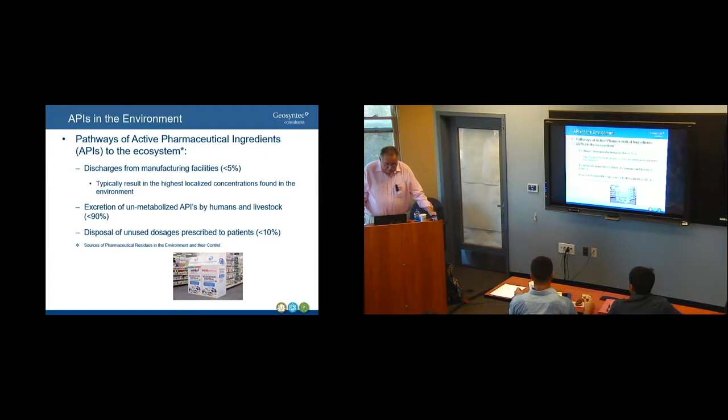So APIs in the environment can basically be classified into three areas: toxic chemicals, what I call cytotoxic chemicals - really some of your anti-cancer drugs, which at very low dosages are extremely toxic to the human body - and endocrine disruptors, hormones. That's an issue because you hear about feminization of fish in aquatic streams and things like that. And then the other one is antibiotics.

Antibiotics are, I think, one of the real emerging issues coming up these days. If you look at any of the World Health Organization information, there's a lot of talk about antimicrobial resistance. Antibiotics are so prevalent in our ecosystem that there are now many different bacteria becoming resistant - there are resistant strains of tuberculosis now. It's a real issue. And pharmaceutical companies' biggest focus now is antibiotics - how to treat them to make sure they don't go into the environment.

So why is there a focus by large pharma on this issue? A lot of our clients are large pharma - big companies like Bayer, Sanofi, Pfizer, Johnson & Johnson. It's because they use contract manufacturers throughout the world. The pharmaceutical industry has become very competitive - it's not like it was 15 years ago when they were making tons of money. The problem is a lot of these drugs have gone off patent and become generic. There are no big blockbusters out there.

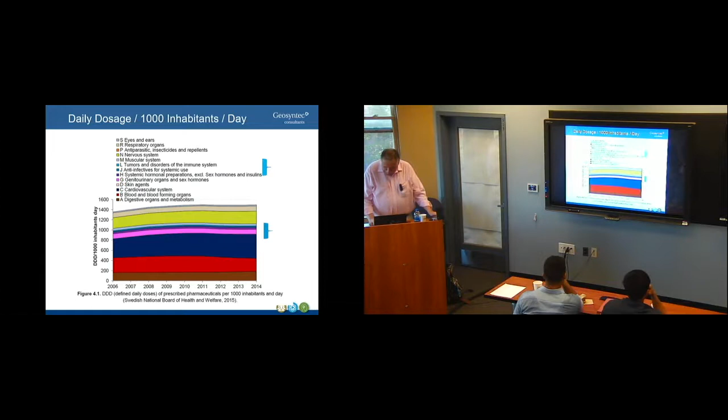So we talked about cytotoxic APIs, and again, these are just basically high potency active pharmaceutical ingredients, and they're extremely active from a pharmacology perspective, but they can also be extremely toxic to humans. And they have very strict requirements as far as the health and safety of people who manufacture these compounds. Again, fortunately, they're the most extremely toxic compound, but they're at the lowest dosage. So you don't really see cytotoxics that much in the environment. If you do, you see them in really low part per trillion concentrations.

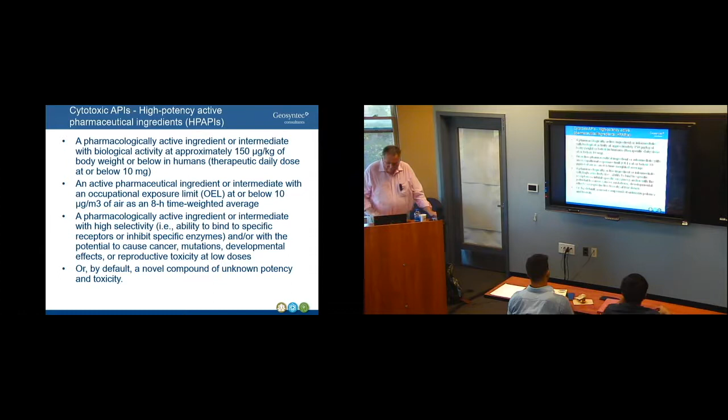And the normal way to handle these compounds is, as mentioned, level A PPE. You have to dress up in moon suits basically to handle this stuff. These are specially designed systems that basically contain the air, so they have special air handling units. They have isolation locks - when an operator comes out, he's decontaminated with hypochlorite or some solution. They go through, like a typical hazardous waste site, a decontamination area.

And the fortunate thing about cytotoxics is because of how toxic they are, they're very well handled in the pharmaceutical industry. We have special treatment processes that handle this stuff. They're acidified, they're hit with caustic, or they're chlorinated - and that's how, depending on the molecule, the anti-cancer drug, they treat any kind of waters that are generated from that formulation.

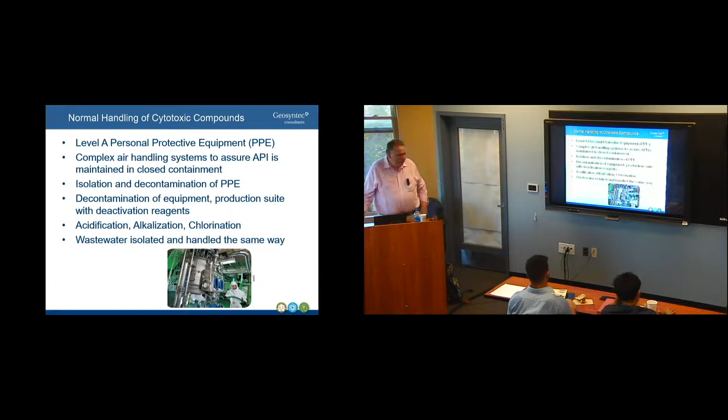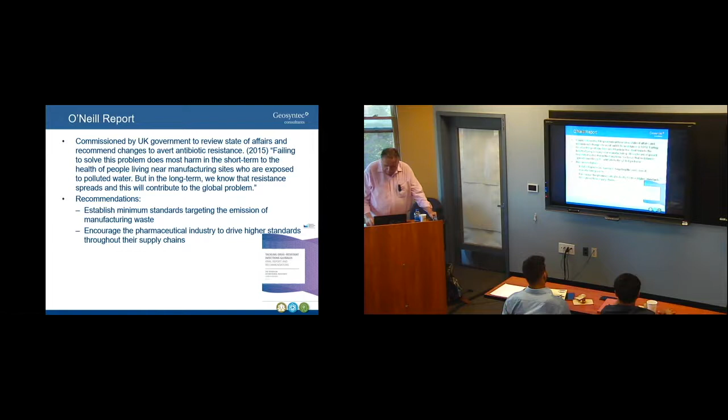So this O'Neill report was sort of a genesis on a lot of the antibiotic-resistant organisms. It was commissioned by the UK government, but basically said we got to do something about this. This is really important, this is a major issue, understanding antibiotic resistance and how it impacts basically our human health. And so in the United States, there's greater than 25,000 deaths a year due to just basically the fact that we don't have an antibiotic that can handle that particular infection.

So it's become an extremely important issue with the pharmaceutical industry. I can tell you that all the major pharmaceutical companies, all the major heads of the environmental health safety divisions are focused on this issue. This is a major issue. And one of the things that is kind of interesting is there's been a lack of discovery of new types of antibiotics. So that's also not good either. So the combination of having this issue come up and the fact that we're not discovering any new types of antibiotics, it's an issue in the world.

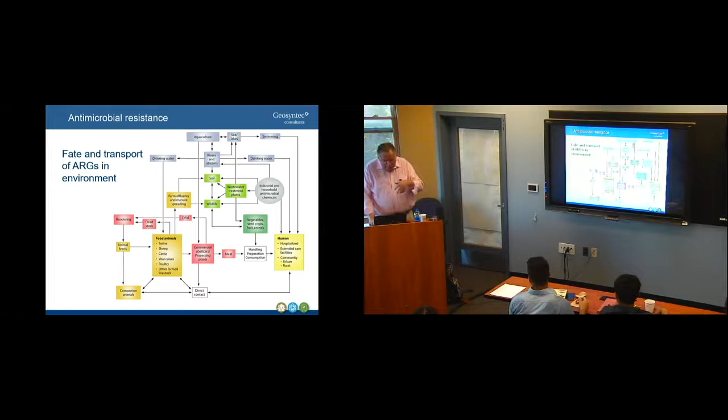but this is just a slide that talks about the fate and transport of the compounds in the environment. And what everybody thinks is that in wastewater treatment, you're biologically treating waste. You may break down the molecule and get some removal. Well, it's great, it doesn't go out in the water, but it goes out in the sludge. So what do you do with the sludges? A lot of sludges go to land. So it gets into the food chain, and that's why it's sort of an endless cycle.

So I want to talk about how to remove APIs, active pharmaceutical ingredients, and how to predict them and how to prevent them. I'm going to talk a little bit about pharmaceutical processes.

So what we do in the pharmaceutical industry is an impact assessment. You evaluate the pharmaceutical process and determine how it gets into the water, into the wastewater system. So we end up generating estimates. Some estimates are based on batch records. We can really determine what we call basically unaccountable losses, because the pharmaceutical industry is so driven by batch records.

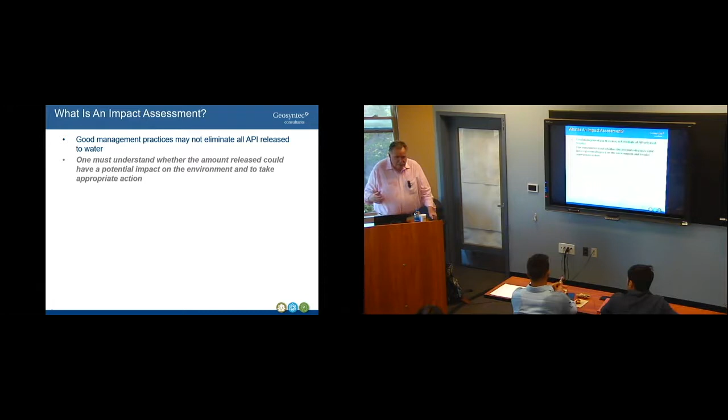Everybody knows what the yield is. So I could say I added 70 kilograms of this active ingredient and I got 99.92% yield, because I know what went into my product. I know what went into my samples. So it's a very well regulated process, but it requires a lot of data interpretation and professional judgment.

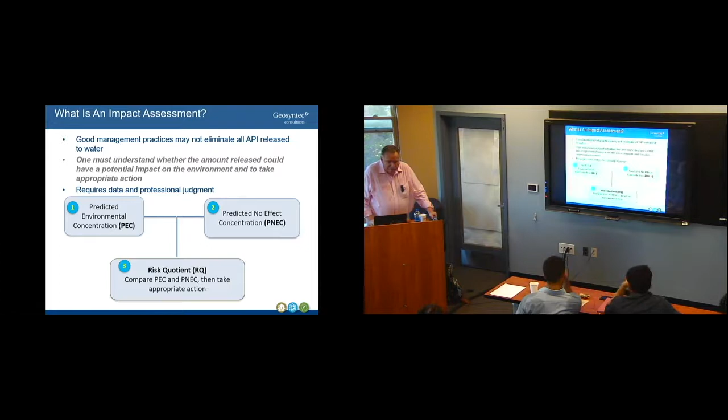People who know the processes. So what we try to do first is predict the environmental concentration, the PEC. And the other piece of information we have is the predicted no effect concentration, the PNEC. There's ways to calculate the PNEC value. And then what we do is take the PEC over the PNEC and develop an RQ, risk quotient. Anything over 1 requires appropriate action. So it's a desktop risk assessment for looking at pharmaceutical processes.

So calculating the PECs is how much goes into the environment, and essentially it's just a mass balance, understanding what the flow is and what the concentration is, so you know how much mass goes into the environment. Sometimes in predicting environmental concentrations, we want to understand the effect accounting for dilution, like receiving streams when the wastewater goes into a receiving stream. We also want to understand if there's any reduction that's occurred at the facility. So we need to understand treatability and dilution factors.

So at an operating facility, you have what you're making, say a pharmaceutical liquid, you're putting the active ingredient in, then potentially you dispose of some of that liquid down the sewer, and you can figure out what the mass is. That's the sort of loss that you may not want to see go down the sewer, and we call that the unaccountable loss.

A lot of the loss occurs through systems like dust collection systems, used for engineering controls. That stuff goes into filters and ultimately is incinerated, because we incinerate all our APIs. We don't put them into landfills. Everything in the pharmaceutical industry is incinerated.

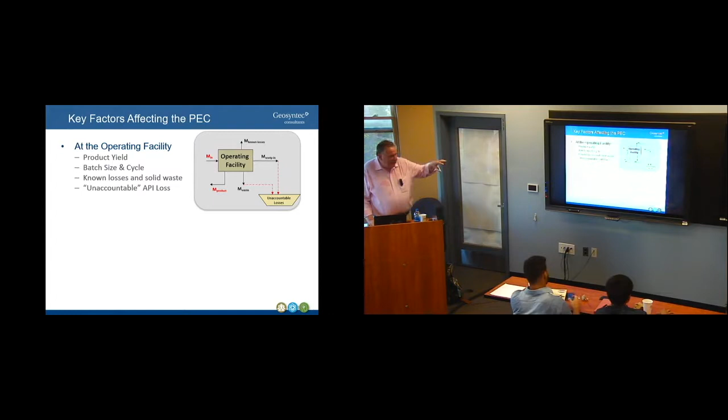So looking at the operating facility, the other aspect is understanding what is happening at the wastewater treatment plant, at the pharmaceutical facility if they have a wastewater treatment system, or understanding what's going on at the POTW. And then ultimately we want to understand how it hits the receiving stream. So we're focused really on what is the predicted environmental concentration in the receiving stream. That's the most important number we need to calculate.

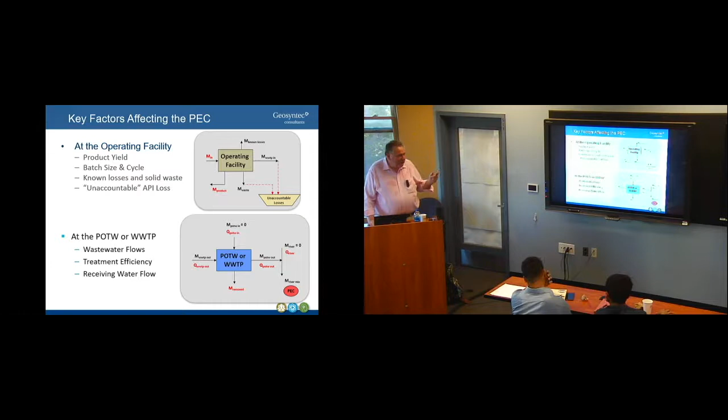And then we take that and we want to know what the PNEC is. There's a couple ways to figure out PNECs. One is looking at your aquatic data, and the more data, the better. What we do is look at the lowest no effect concentration of that particular species, whether it's Daphnia or green algae, things like that.

Sometimes that data is available from the supplier, but you can take that information and calculate a PNEC by taking the lowest concentration that's recorded and dividing it by an assessment factor. In this case, we divided it by 10 because we had 3 data points. So that's how you calculate the PNEC. In this case it's relatively low, 0.014 milligrams per liter. So that's a predicted no effect concentration.

There's also published values of PNECs. The Antimicrobial Resistance Alliance has published PNECs for all antibiotics, pretty much everything. Also, there are a lot of good scientific journals out there that have PNEC values published. And then basically in Temple, there's the Water Environment Technology Center, and they do a lot of this type of research, understanding what the PNECs are.

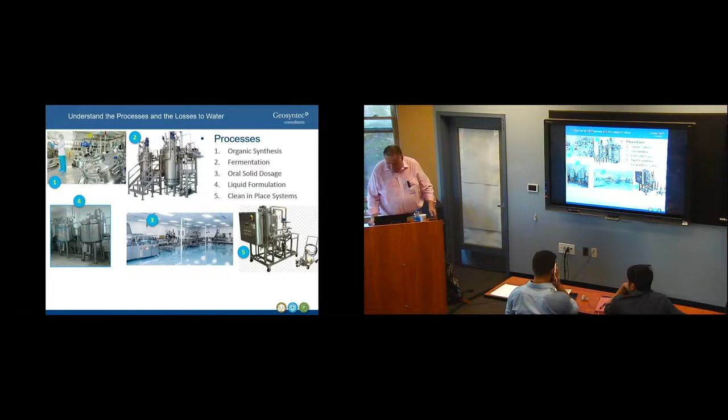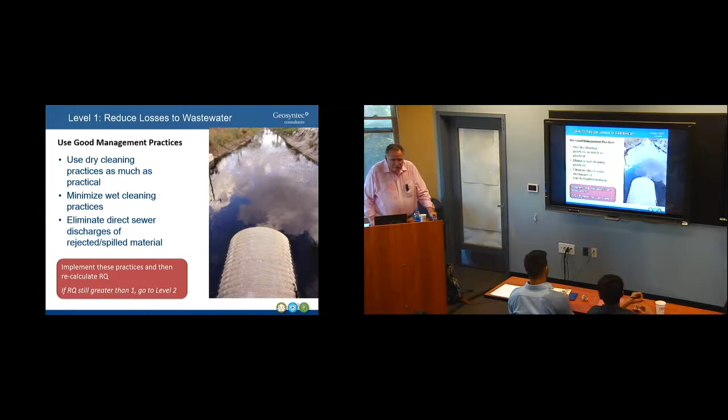So again, basically you want to reduce the API that goes to wastewater, so you want to use dry cleaning practices as much as practical. You want to minimize wet cleaning processes, and you want to eliminate the discharge to sewers. You want to do these things and see if your RQ is less than 1. If it's not less than 1, you need to go to level 2, which I'll talk about. That's point of generation treatment.

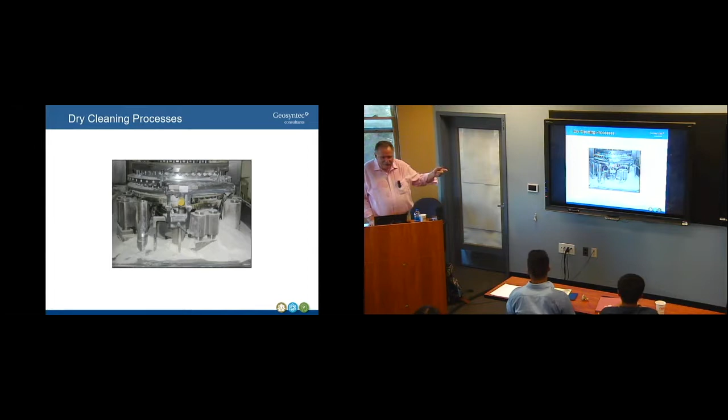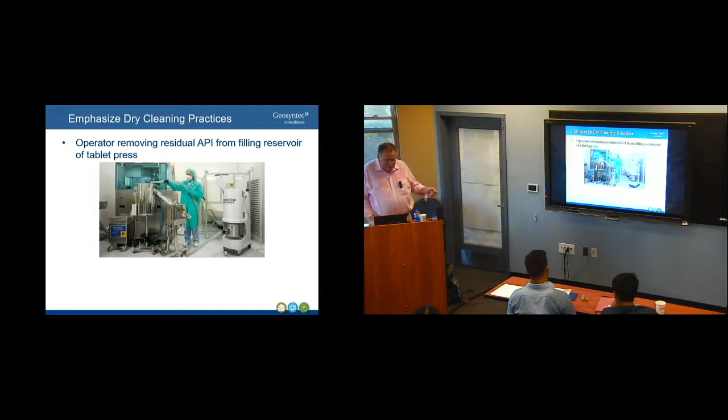So you want to minimize wet cleaning practices. Again, you don't want to be taking a fire hose and hosing down all the equipment and putting it to the drain. The objective is to first suck up this material as much as possible and incinerate the powder that you collect, and then you can use your wet cleaning process.

The other thing you want to do is eliminate direct discharges to the sewer. This is a liquid formulation suite to the right—it's an immaculate system with epoxy floors and no floor drains. The idea is to clean these tanks using a clean-in-place system to the left, and capture that water after cleaning in place and treat it specially. We don't want to just discharge that to the sewer.

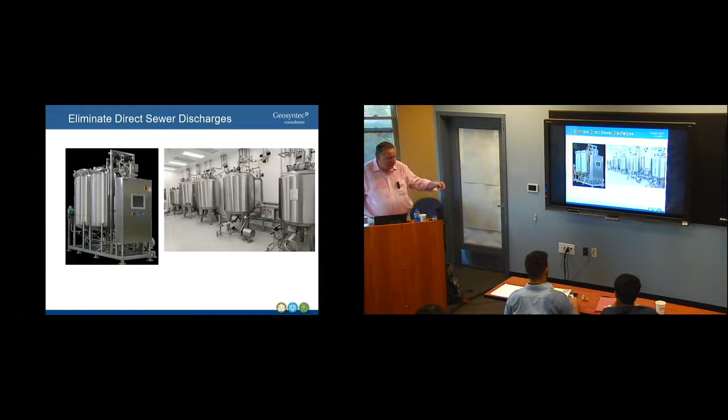The second level of treatment is to collect wastewaters at the point of generation. We have clients that clean their equipment with first and second rinses. It has very minuscule concentrations of API, but they don't want to send it to the POTW—they want to collect it and take it off for off-site incineration.

But there are other treatment steps. You can do alkaline treatment, you can do advanced oxidation. A technology we're looking at is electrochemical advanced oxidation.

That's actually used quite a bit in India because of the price of energy—evaporation, zero liquid discharge technologies. I don't know how, I've heard zero liquid discharge is used more prevalently in India. I don't know if that's more of an urban legend, or if it's because there's also high concentrations of pharmaceuticals in surface waters in India. And then again, off-site incineration.

This is an advanced oxidation system, which basically takes small volumes of wastewater, collects it, and runs it through a hydrogen peroxide ozone process called HiPOx. Again, we want to make sure that after you do this, the impact to the environment—the RQ—is less than 1.

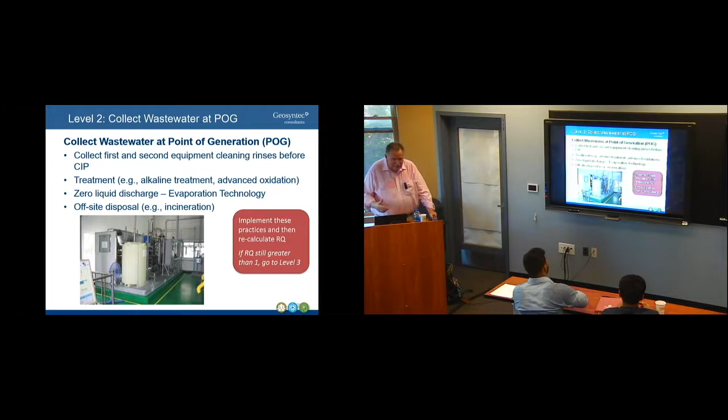If it's not less than 1, we have to go to level 3, which is end of the pipe. But I want to show you another technology we're looking at now—it's a simple evaporation process. You're taking those wastewaters that have those concentrations in them—not high volume—and you're evaporating, generating a steam plume, and you end up with a brine at the end of the process.

So this is something we're looking at right now for clients. It's a very cheap way to treat water—with the price of natural gas, it's somewhere between 8 cents, maybe as high as 15 cents, but mostly less than 10 cents a gallon. The other interesting thing is it's much cheaper than off-site incineration, where you pay a buck a gallon or even $1.50 a gallon to incinerate water.

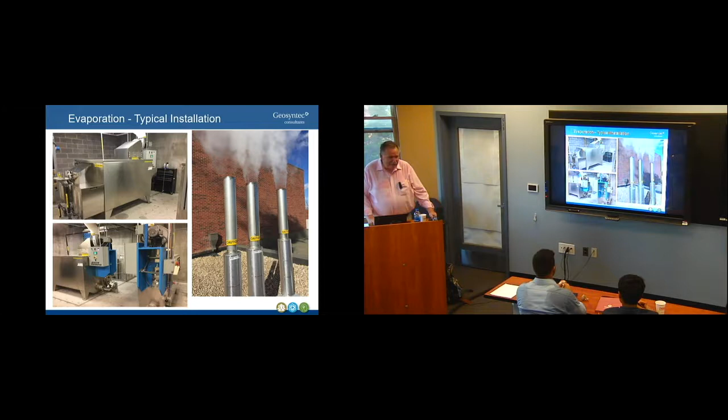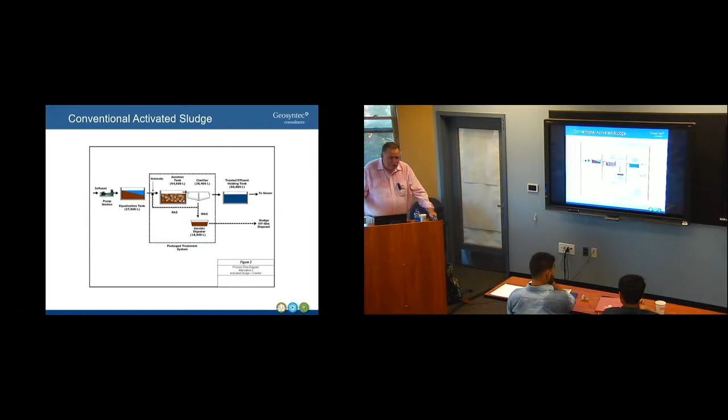I want to talk at a high level about some of the treatment technologies that are working out there. Conventional activated sludge—everybody likes conventional activated sludge. I've put a lot of these systems in at pharmaceutical facilities over my years. It's great to remove the API out of the water, but you also want to understand what's in the sludge.

Sequencing batch reactors—another aerobic biological process. When I first started my career, I was the first one to put in an SBR in Puerto Rico. That was the first SBR that was ever constructed in Puerto Rico. It worked great because it just consumed alcohols.

It was like alcohol was jelly beans to the bugs. We generated sludge, but it was a great system and really saved a lot of money for the company. It was funny—when I went back after the pharmaceutical industry changed ownership, it used to be owned by Pfizer, then Johnson & Johnson, then Pharmacia—it had this crazy history behind it.

I got sent down to this plant because they knew I put the wastewater treatment system in. So I go down there and they're running the wastewater treatment system. I asked, 'What's your loading rate?' They said, 'Oh, it's about 5 pounds a day.' The thing was designed for 2,000 pounds a day. I said, 'You're kidding me, you're running this system like that?' So what I did was take all the alcohol that was being incinerated by Veolia at $1.50 a gallon and just fed it to the biological system.

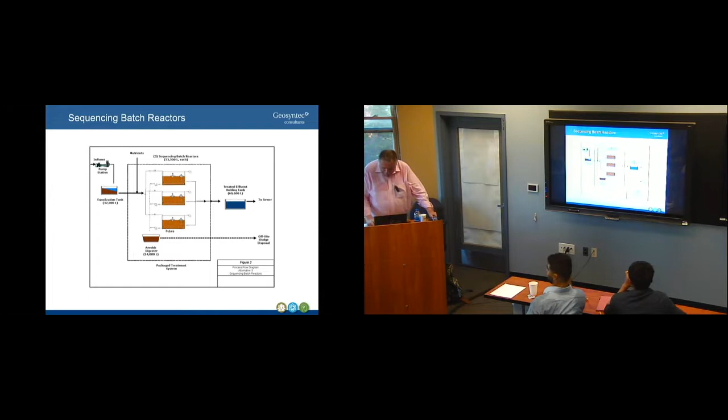So it worked great. So moving bed reactors, another technology, and another technology are basically membrane bioreactors.

That's sort of like some of the new pharmaceutical plants are putting these systems in. These are generally at large API plants that generate or synthesize chemical, organic APIs. They don't put these systems in at formulation facilities because they have a very weak load. There's not much high strength wastewater coming from a formulation facility.

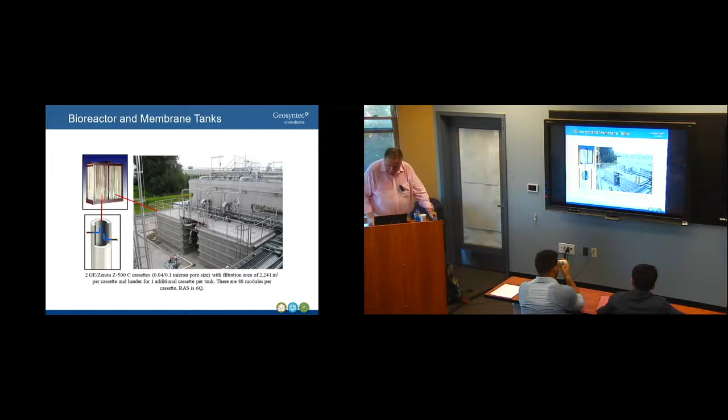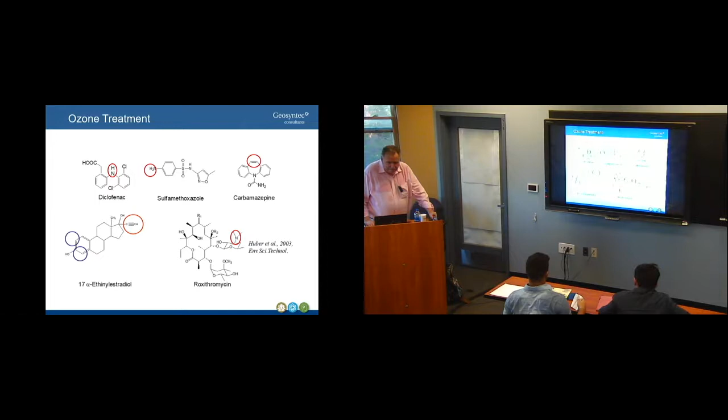Ozone works great. We've got systems in with ozone, and it works well. Especially on certain pharmaceuticals, hormones, antibiotics. It cleaves a lot of critical rings, so ozone treatment is a very prevalent process in wastewater at pharmaceutical facilities.

We did an evaluation of chemox treatment processes, looking at UV, hydrogen peroxide, catalyzed UV hydrogen peroxide, different chemical oxidation processes, and the compound reduction we get with APIs, reducing the API in the water, is like over 99%. The problem is with these processes, if you have a lot of other organics in there, like alcohols, it's a much higher cost. So generally, you try to use this more as a polishing process rather than at the end of the pipe.

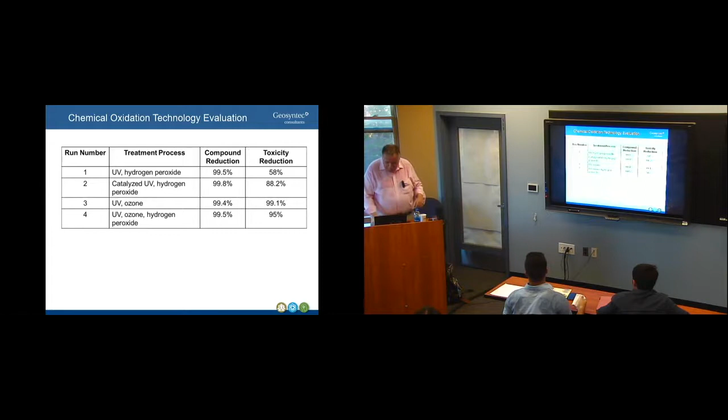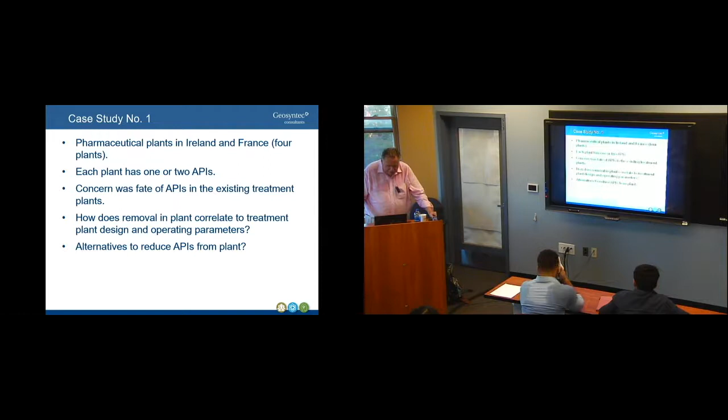Case study in Ireland and France, we looked at 4 plants. Each plant had 1 or 2 APIs. We were concerned about the fate of the API leaving the treatment system. We wanted to understand how the removal correlated to the treatment plant design.

So, we looked at a site in Ireland. We had some different types of APIs, a mixture of hormones, various synthetic hormones, and hormones that come from extraction processes.

Real interesting concept. Be curious to understand if anyone knows how a particular hormone is basically processed. How do you get a hormone? Does anybody know? There's a hormone out there, mostly women take it, called Premarin. What does Premarin mean? Where does it come from? It is pregnant mare urine. Yes, it is. Very good. Are you from Canada?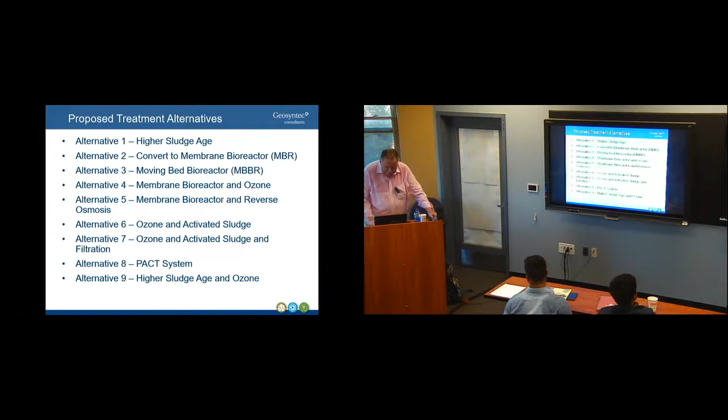So one of the things we did was look at a bunch of different processes, higher sludge age, different types of biological treatment. This was an evaluation of different alternatives, and we ended up looking at a membrane bioreactor to take out the high strength materials, the organics, followed by an ozone oxidation system. It really did a great job. The combination of biological treatment followed by ozone polishing worked out well.

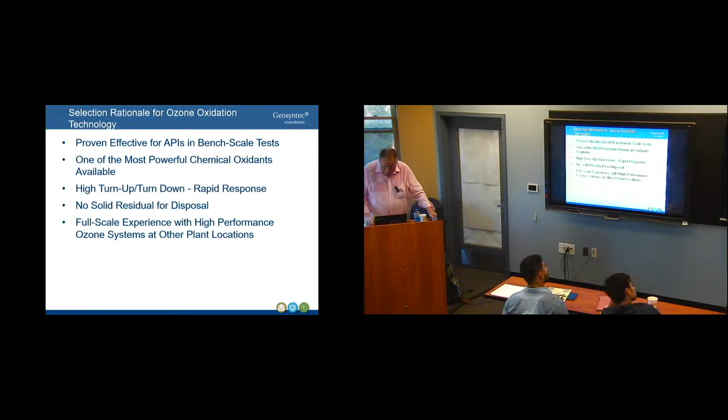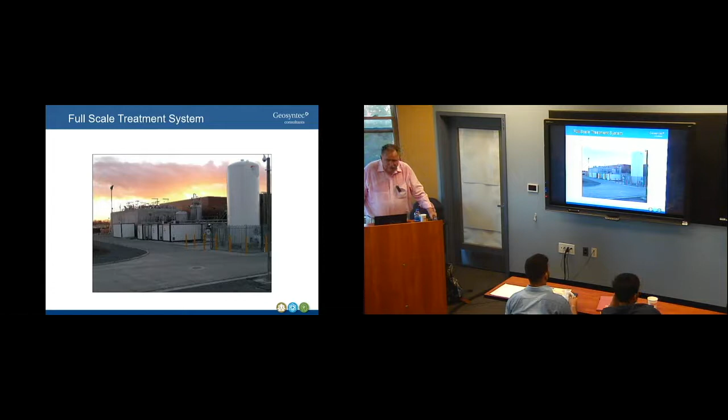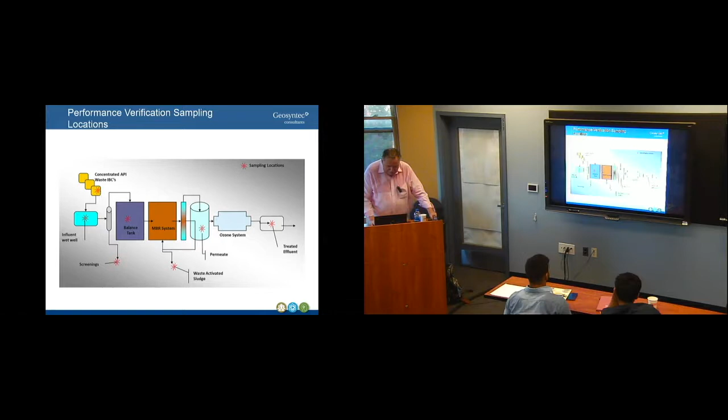Here's basically the ozonators at the site, and we did a bunch of sampling in this process. So we did performance verification, and what we did in this facility, we looked.

And then we also did an estrogen screen at this site because it had hormones, and again the hormone concentrations were significantly reduced.

So kind of my takeaway on this, I wanted to really drive some points home with you guys before you leave. The current driver in the pharmaceutical industry is antimicrobial resistance, and reducing the amount of antibiotics that get to the environment. So we're working with some clients now looking at specific treatment processes.

It's interesting, some of these pharmaceutical facilities that basically make antibiotics are done mostly with fermentation. And the fermentation process involves larger volumes. They end up generating larger amounts of liquid waste. And some biological treatment systems work really well on certain antibiotics, certain molecules, and sometimes they don't break it down.

So we're looking at some bench scale work right now where we're increasing the temperature of the wastewater and then hitting it with chlorine basically. So there's another thing we're looking at now, electrochemical advanced oxidation processes.

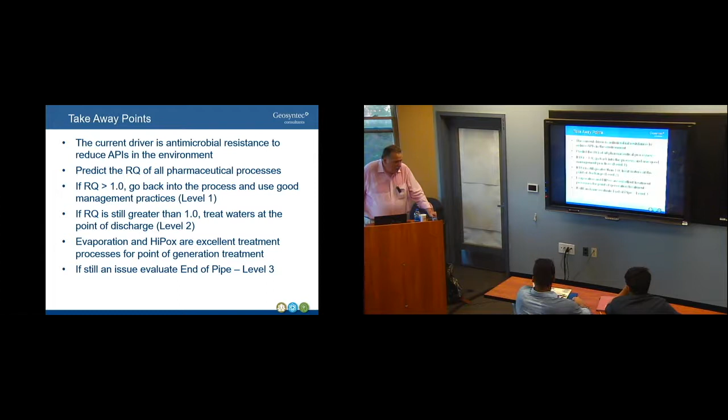Evaporation's a good technology. HiPox systems are an excellent process. Again, that's hydrogen peroxide and ozone. And then if it's still an issue, go to level 3, which is end of pipe.

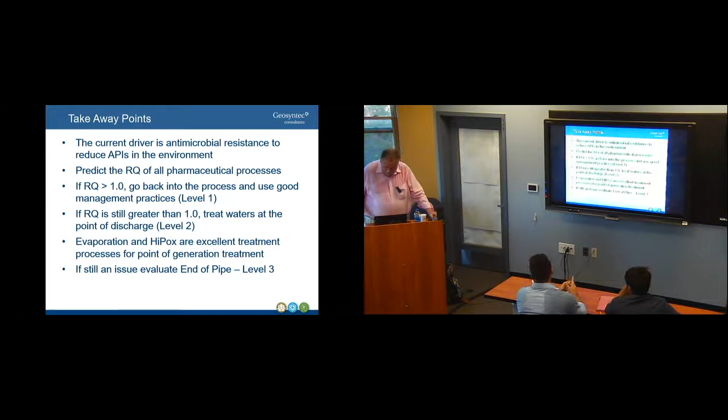So we found that biological treatment plus advanced oxidation was really a proven process train that worked very well. We used biological treatment to take care of the majority of the organics, and then polished it with advanced oxidation. Ozone and other oxidation processes have been used very well in that polishing step.

And we found in that analysis, for estrogen compounds and APIs, we got over 99.9% removal.

We look at treatability studies, process modeling tools, and we're working with clients today in coming up with different design criteria to come up with solutions if you have to go to end of pipe. Carbon adsorption, alkalization, electrochemical processes, thermal evaporation, they're all decent processes to evaluate.

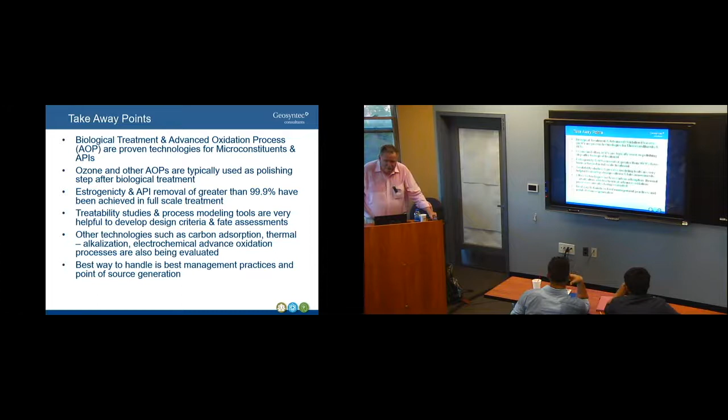And basically, again, the best way to handle this issue is really how to manage the production process, what to do when you make a tablet, when you make a liquid, and understand you don't want it to go to the sewer. That's the bottom line.

So I think that's it. Any questions?